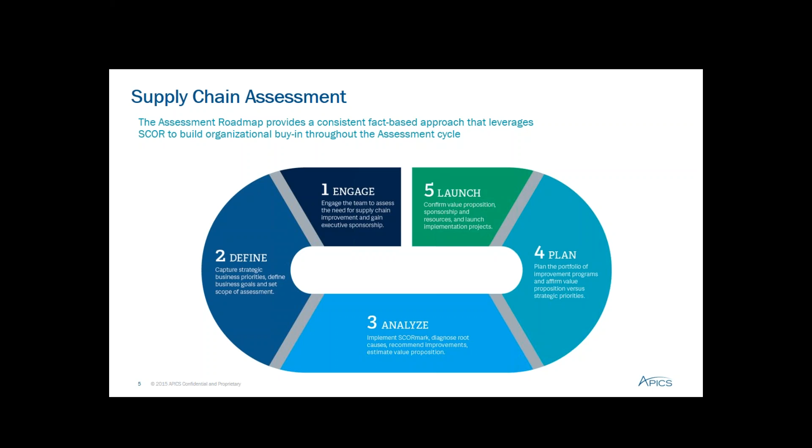The key we have learned is to think big, act small, and scale implementation fast. If you want more information on how APICS can work with your organization to improve your supply chains, please feel free to contact me. My contact details are included at the end of this presentation.

As I mentioned previously, benchmarks and best practices are critical to understanding the current state and performance gaps of the strategic supply chain. To share with you some exciting benchmarking research recently conducted in the chemical industry, I am excited to introduce John Brandt, CEO and founder of the MPI Group.

John has devoted more than 2 decades to studying leadership in effective, purpose-driven organizations. As an expert on how companies can adapt themselves to the realities of new markets, new corporate structures, and new customer expectations, Brandt is an accomplished management innovator and an internationally recognized expert in manufacturing and technology.

Before founding the MPI Group in 2003, John was publisher and editor-in-chief of Industry Week magazine, which garnered more than 70 editorial awards of excellence and doubled its revenue under his leadership.

Additionally, John serves as the president, publisher, and editor-director of the Chief Executive Group, publisher of Chief Executive, where his leadership transformed the magazine into one of the publishing's most surprising comebacks.

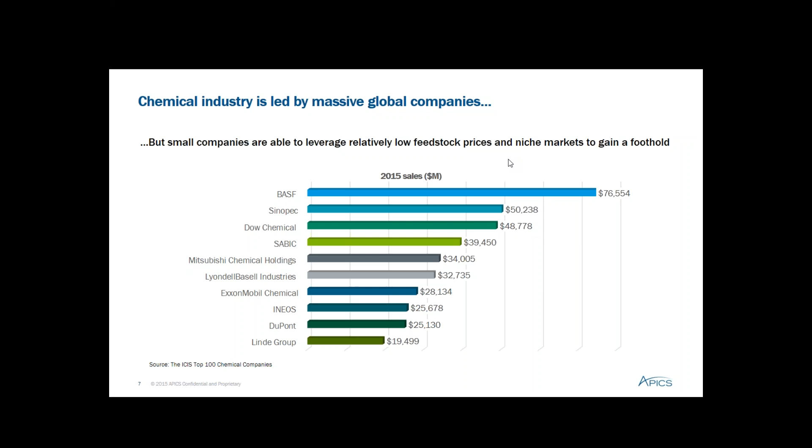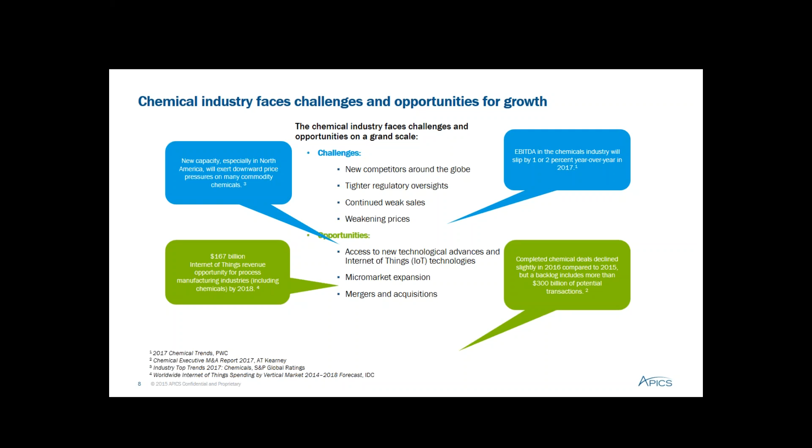On the other hand, there are enormous opportunities right now. There are technological advances, not just within the processes and machinery and new formulations, but also opportunities by using the Internet of Things, IoT technologies, to improve production. There's a lot of new markets for niche chemicals, a lot of micro markets emerging, and there are mergers and acquisitions. Just in the M&A space alone, last year completed deals were slightly down versus 2015, but there's a backlog of about $300 billion of potential transactions. And if you take a look at revenue opportunities related to the IoT—in terms of improving production, but also starting to figure out how to use IoT in products and delivery of products—there are estimates that there's $167 billion worth of opportunity there. So tons of challenges for this industry, but also tons of opportunities going forward.

What this means, though, is that when you've got opportunities and challenges like this, it's really important for executives to be strategic and to be looking forward, but it's even more important for those executives to make sure they've got people working operationally to figure out how to build a really solid operational foundation so we can grow, so we can take advantage of these opportunities, so we can meet these challenges. What we find is that companies doing great things are focusing on that foundation of operational excellence, making sure they've got the processes in place to be first to market with new products and innovations, to use new technologies including the IoT, and to meet customer demand for more customized, more niche products.

Something that's been a trend within the discrete manufacturing industries for years, rapid changeovers, is increasingly important in process industries, and especially in the chemical industry. And of course, when there's M&A opportunity and there's money out there, you're always wanting to look at improving your

book value so that you can maximize the opportunity for you to acquire or to be acquired. The first step in any operational improvement is to, whether you're working on your business, whether you're working on your golf game, whatever you're working on, the first step is to take a look at where are you right now and how do you rate versus everybody else.

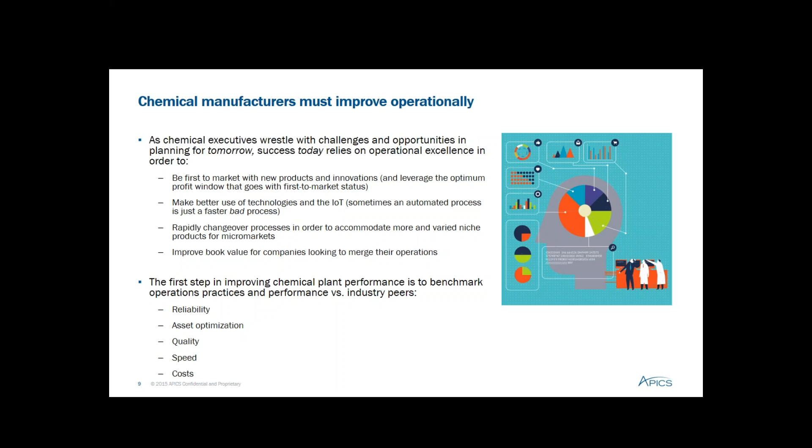So in looking at that, we look across the board when we're looking at manufacturers. We want to look at things like reliability, speed, costs, quality, and asset optimization. And that's what I want to start with here today, is talk a little bit about where people are at with those.

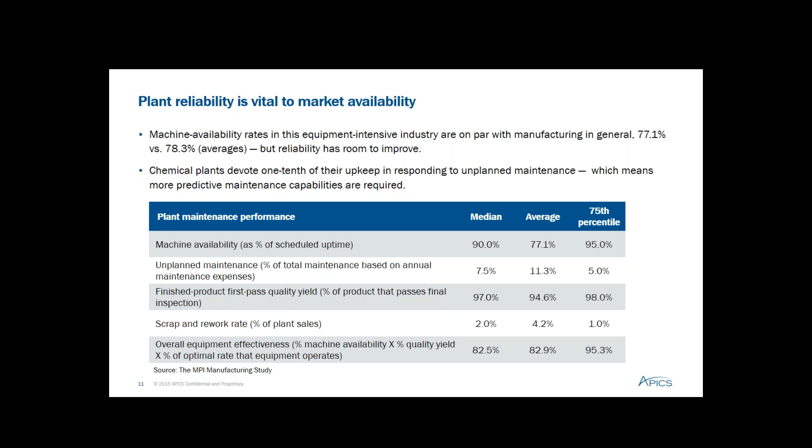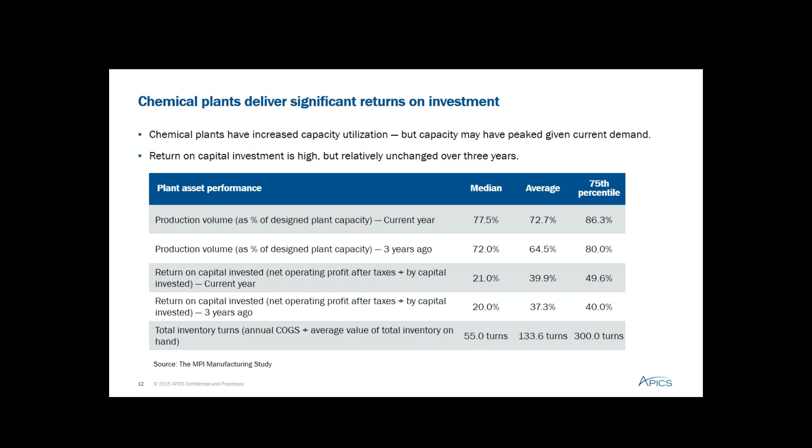We found, obviously, that if everybody in this industry knows, but research confirms, people in this industry are obviously focused very intently on their product and on operations quality, because quality is a key differentiator in any industry. It's especially important in the chemicals industry. It's even more important given increased regulatory scrutiny on this industry.

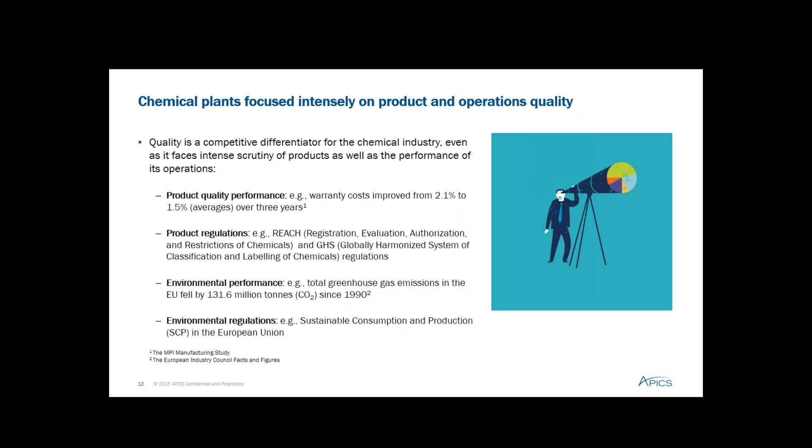environmental regulations, the industry has done some since 1990 in reducing greenhouse gas emissions. I know there's a lot of talk about potential regulatory reform in the United States. That may or may not occur. We're not seeing a lot of movement of legislation right now in the U.S. Congress. This is something that is clearly, whatever happens in the short term, in the long term, focus on quality, focus on some environmental and meeting regulatory requirements is going to be increasingly important in this industry.

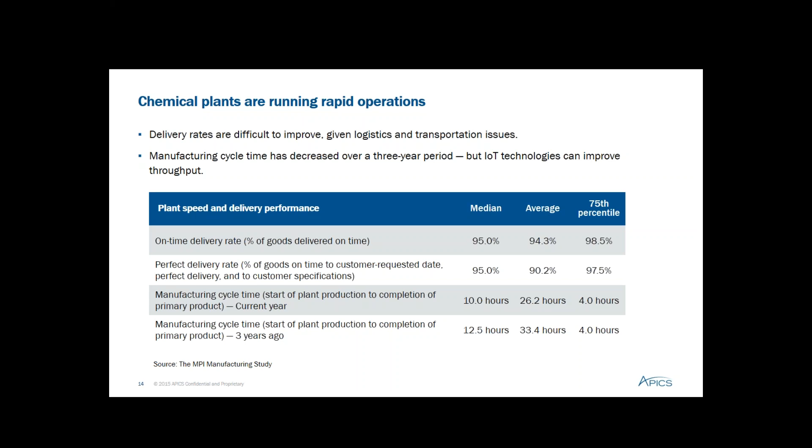I think there are some technologies out there that are going to improve production, improve speed here, and be able to improve quality for folks as well. And we'll talk about those in a little bit.

Again, this is an industry that has historically outperformed other manufacturing industries in terms of productivity. If you look at manufacturing in general, the average productivity, measured in sales per employee, is $256,000. In chemical, it's $374,000. These are typically large plants operating automated equipment at high volume. It's no surprise, and a majority of these plants were able to increase their productivity over the last year.

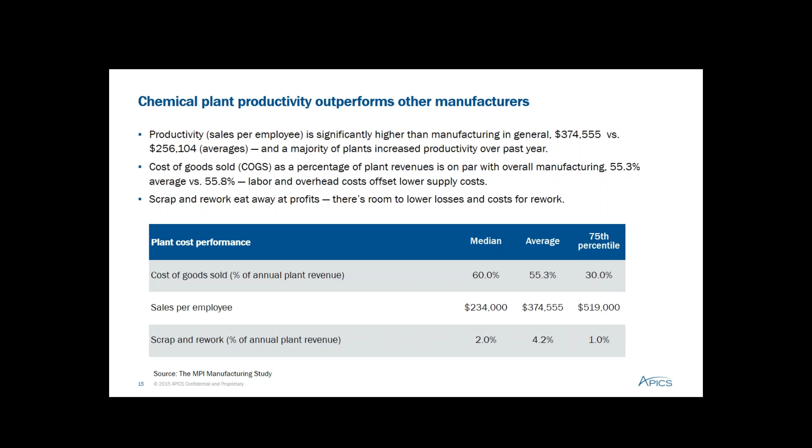Cost of goods sold is about the same as the rest of manufacturing. But again, I want to point out once more that scrap and rework as a percentage of annual plant revenue, that's a big percentage, 2% there. That is something that with improved processes, improved adoption of best practices, can be worked on and managed.

So let's talk then a little bit about best practices, a little bit about what people can do to work on some of these.

This is where I think there's a huge opportunity here, and I want to stress this, because we're going to go through a series of things that people can do, and stuff that you see in other manufacturing industries is typically just not done at the same rates or at the same level in the chemical industry. And what do I mean by that?

The problem comes in, as often happens, when you start looking down into specific practices. Typically the reason I like to look at this is that if you ask people whether they've adopted a specific improvement methodology or continuous improvement, a lot of people say yes, because they may have just tried it, somebody went to a seminar, somebody read a book, they tried it in one line or one aspect of the plant, etc. What we like to do is dig down a little bit more and ask about specific practices, because that typically gives you a better picture of how thorough, how deep, how long-term an implementation has been, and whether it's serious or not.

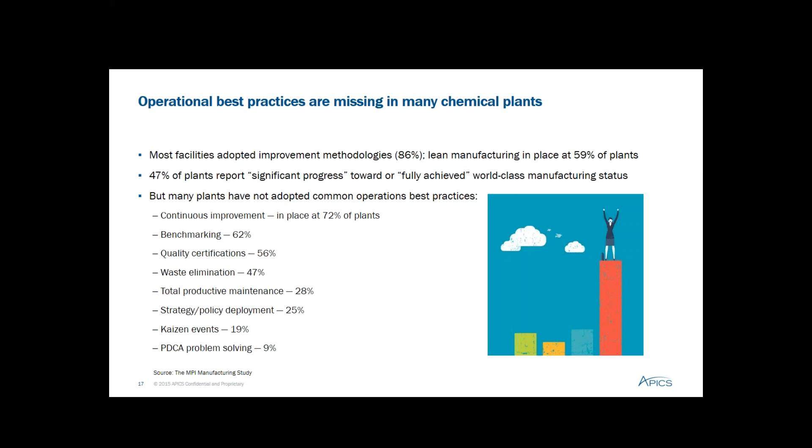It is clear that in this industry, a lot of the practices that you would think would be present at a plant that is really serious about an improvement methodology or continuous improvement just are not being adopted at the same rates. And that's a concern, and that may explain some of the other metrics we looked at earlier, the scrap and rework, the unplanned maintenance, why those numbers seem persistently high and oddly high compared to maybe some other industries.

There's a lot of reasons for this, but one of the reasons that can happen is that if you look overall at all of manufacturing right now, obviously improvement methodologies, there's a lot of them: theory of constraints, Six Sigma, lean, etc. When you look across most of manufacturing, you've got about 80% of manufacturers who have tried lean, obviously much lower in this industry.

The reason for that is that lean, especially early on, was often perceived by those in the chemicals industry, and really in any process industry, as being something only discrete manufacturers would do, because it was only related to one-piece flow processes, labor-intensive operations. You're working on this, and that's how you do it.

What we are finding more and more right now in process industries is that people are now saying, look, there's ways for us to adopt lean, there's ways for us to use lean in this. One example is Adam Russell of Eastman Chemical Company, who talks about the fact that you need to get away from just thinking about lean as something for discrete manufacturers, and take the principles of lean but remove them from that discrete context.

The way he suggests doing it, in an article in Chemical Processing called Go Lean, is to do what lean does: figure out what is your value, map your value creation process, and then figure out what are those measures that matter to your organization. Then when you're taking a look at that value stream, take a look at what are the things impeding that. What are the things, for example, causing unplanned maintenance? What are the root causes of that?

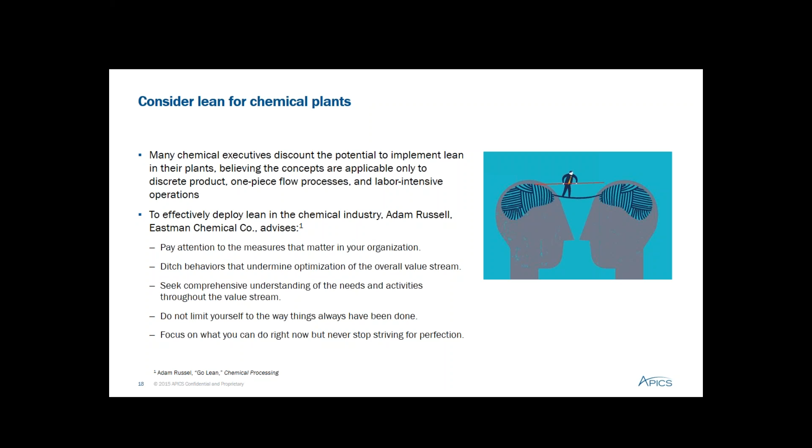The reality is, when somebody comes up with a great new idea in an industry, it is usually not the first time it was thought of on the planet. It was usually benchmarked from one industry and brought to another. So that's the way to take a look at it, and I would really encourage you to look at lean, but taking it out of that discrete context and putting it into a process context.

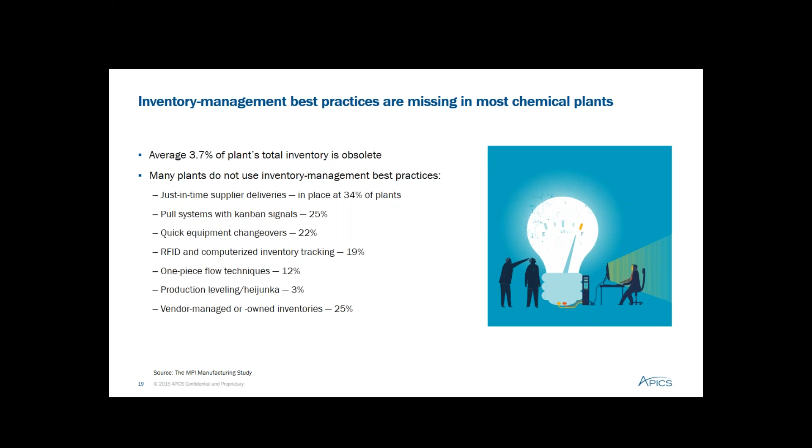So there are real opportunities to adopt not necessarily even leading-edge stuff, but things that other manufacturers and other industries have been doing for a number of years.

Here's an example, an anonymized case study. This was a global chemical company that provides water treatment solutions, and they were having a problem common in the chemical industry: they could not manage their inventory on hand. At one point, they saw a 20% increase in their inventory levels in less than 4 months.

Everybody on this phone understands what that does to your cash flow, what it does to your bottom line, what it does to carrying costs, and what it does to production processes when people start seeing inventory pile up.

So they decided on a two-part management solution. This is not rocket science, just blocking and tackling. They set up ordering and stocking policies, which unbelievably they didn't have before. Then they established processes to continuously monitor, control, and improve their inventories. You can set this up through your ERP system or however you want to do it.

What they were able to achieve in a very short period of time was to reduce their carrying costs of on-hand inventory by almost a third. They increased their inventory turns from 8 to 9.

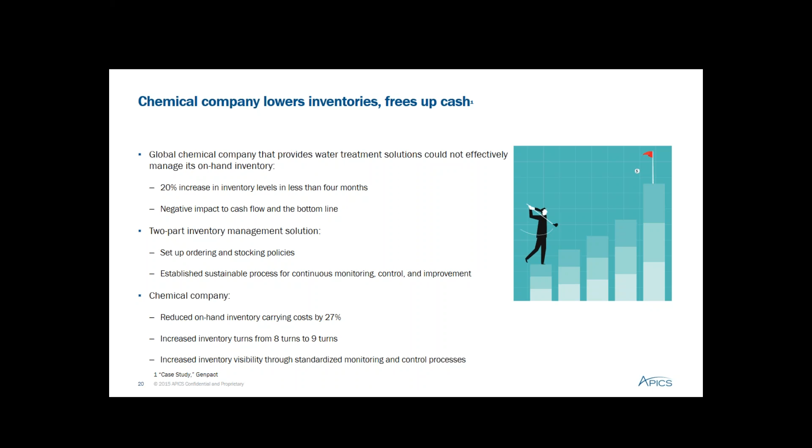Because they were monitoring it, all managers and executives had visibility into their inventory levels. The reality is, in management, this is just Peter Drucker 101: what gets measured gets managed, what gets managed gets better. So in some ways this is just as simple as awareness and putting a team on it to figure out how to manage inventory better.

We do find that most chemical plants are trying to pay attention to human resources and best practices. You've got a little under half who have empowered a majority of their production workforce, and that is something we see over and over again.

Plants that really perform well - the larger the percentage of workers who are empowered or in self-directed work teams managing the work themselves, the better the performance. About half of employees are fully engaged in their plant's improvement methodology, whichever one it is, whether it's Lean, Six Sigma, whatever.

We find over and over again, and we've been doing this study for 20 years at this point, that the more employees you have engaged in an improvement methodology, the better you do. The longer you've had the improvement methodology in place, the better you do.

We've got 41% of plants who say they train each employee more than 40 hours annually. That's actually pretty good for an industry average. 40 hours is what we've found over the last 20 years to be the world-class standard. If you want to be world-class, you're going to have to train at least 40 hours per employee per year.

If you look at really top-performing plants, they typically train even more - 60 hours, 80 hours. We've seen plants training as much as 300 hours per year in specific industries. I'm not saying you need to do that, but we do see that these plants that train more generally outperform.

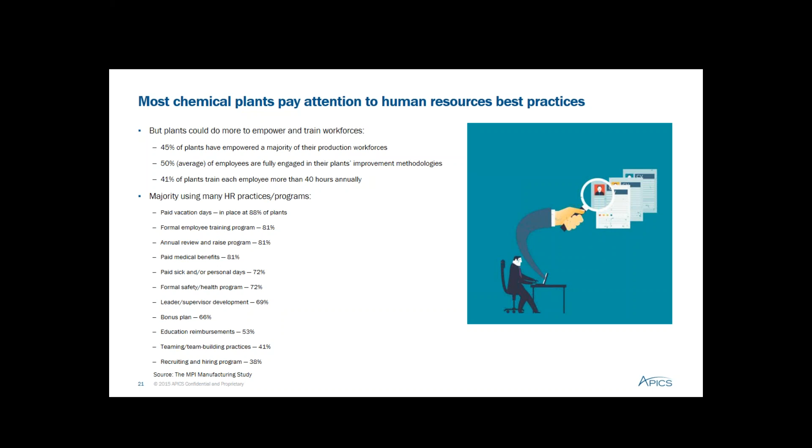A great example of a company that invests very heavily in HR in this industry is Dow Chemical. They've got 50,000 employees. If you're an experienced employee, your median pay is close to 100,000, and they put a lot of effort into developing a diverse workforce, having mentoring, cultural training, classroom training, and investing in flexible work options, et cetera.

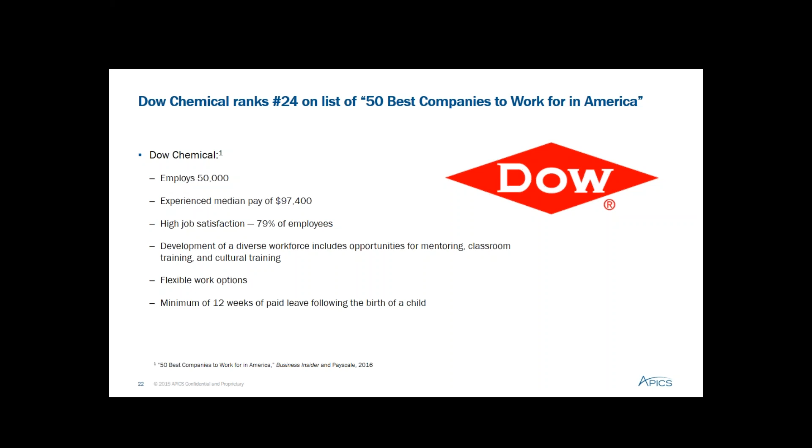This leads to incredibly high job satisfaction - close to 80% of employees report high job satisfaction. Investing in employees is something that always makes your results better in the long term. We've seen this over and over again: companies that train more, companies that empower more, companies that invest in their employees get that back in spades from their employees.

Continuing the list of things that chemical plants could probably do more of, supplier management best practices are just generally missing at a lot of places. When we asked, what's this plant's relationship with suppliers? Is it a partnership? You've got only about a quarter who report it being that way. Only 23% describe their relationship with their customers as a partnership.

When you look at specific supply chain management practices, things you'd want to see in a place managing their supply chain well and proactively, certification is the only one we see that's over half. Everything else is underneath 50%: supplier management, sharing forecasts, customer sat surveys, collaborative design with suppliers and customers, access to customer forecasts.

When you look at that, chemical plants are really most likely to just measure and document quality, reliability, and delivery to schedule of their own suppliers. When you look at other things, like are they documenting criteria and performance of their suppliers, hardly anybody's doing that. That's a problem given that traceability is becoming either a regulatory requirement in many industries and locations, or a de facto customer requirement—traceability of ingredients, traceability of components, labor practices, ethics of your suppliers. This is an industry right now that's not doing as much as many other industries.

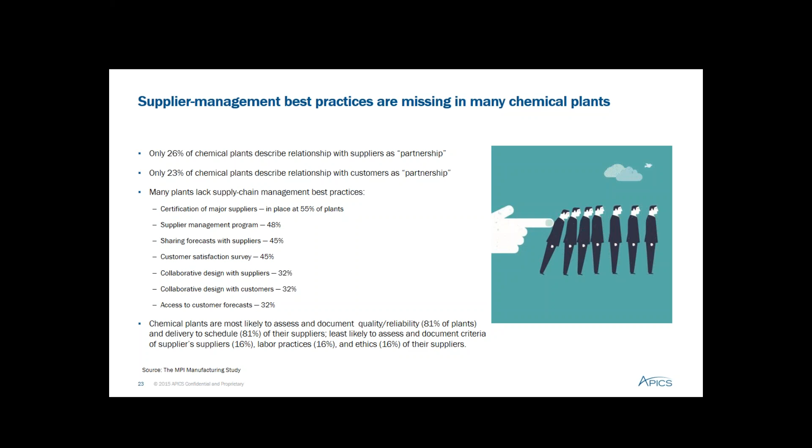So how do you get started? What should you do if you're trying to get started on this? You need to take a look—and I think Caroline mentioned it right at the start—you have to start with benchmarking. You have to figure out your process, your method, and figure out against an industry standard. The SCOR model is a good one, or some other model, to see how we're doing versus that.

Of course, the challenge then is figuring out getting that number. You don't want to just get a number so you can feel good or bad about yourself, like, oh, we're really good on that, or oh, we're really terrible on that. You want to figure out how do we take that and leverage it for improvement. There are lots of ways—I kind of like what AMR put in on how to benchmark your supply chain.

When you're taking a look at your supply chain, you want to figure out not just this specific product, not just this one thing. You want to look at your entire supply chain—tier 1, tier 2, tier 3 suppliers—rather than one particular aspect. You want to figure out, why are we doing this? If we're benchmarking this, does it give us any useful information? How is this going to change behavior?

That is the useful thing. If we were to find something about this, how would it change behavior, contracts, relationships? If it won't change any of those things, then you shouldn't bother tracking it. We also see that where people go wrong in starting an initiative like this is when they decide they're going to boil the ocean—they're going to try to do everything at once. You want to take a couple of things, start with that, and then expand.

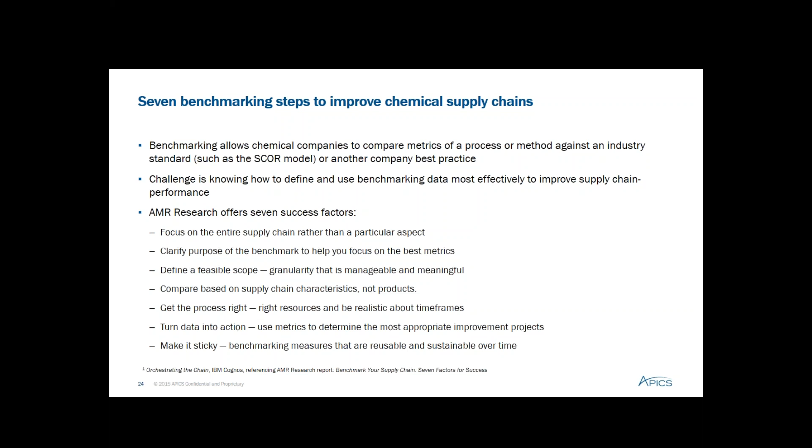That's supply chain. If we look at sustainability, we find now that it is not a major focus at most chemical plants. We've got under a third who report that green and sustainability is highly important or important, and a full third that say it's either only of minor importance or we don't care about it at all. You do see some green sustainability practices at some plants. They tend to be related to things where it directly translates to the bottom line: energy management, recycling and reuse. When you look at stuff like renewable energies, carbon footprinting, et cetera, much, much lower.

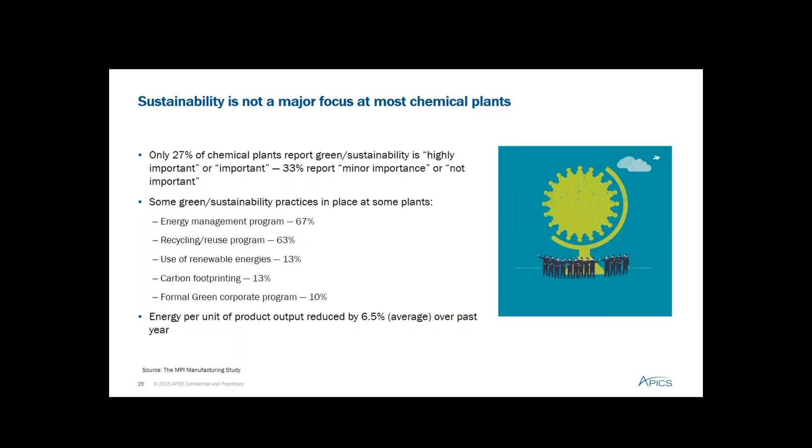Some of those programs do have an effect on the bottom line. Energy per unit of production was reduced by 6% over the last year, as the average. But this is an area where chemical plants aren't doing a lot now. They either by customers or by regulatory fiat are likely to have to do more going forward.

So what do you do? How do you change? You want to start with benchmarking. You want to take a look at that for a number of these different areas. But what we see that really changes, and I've alluded to this before in this presentation, is how do you change the culture? And this is another anonymized case study here. You've got a specialty chemical plant, had close to 300 employees, and basically employees didn't like working there.

You had more than 60% of the workforce were detached or disengaged, and that leads to a lot of things. It doesn't just lead to poor quality performance, which of course leads to poor financials. It also leads to people not caring about a safety program, which means your safety program is off. And safety is an incredibly important measure of employee engagement, and is also incredibly important just for the human cost, obviously. You don't want people to get hurt, you don't want people to get killed. But beyond that, a company's focus on safety, and sometimes using safety as a focus of improvement, shows employees that there's an investment, that you care, and it also makes people think differently about processes and about how to do things.

So leadership put a large investment in trying to change the culture by focusing on safety, by focusing on working with employees, sharing goals, et cetera, building a more collaborative work organization, sharing the goals, roles, communicating, figuring out, doing this. And by investing in culture, by the time they were done with this, they found the disengagement of the workforce had gone from 60% down to 5%.

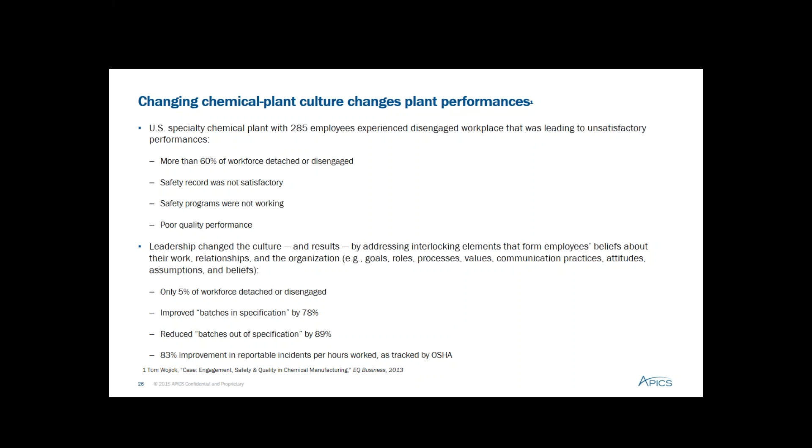This is really important. If I was running a chemical plant and I was looking at these numbers and some of these examples, I know that continuous improvement is important at any manufacturer. It's really important in this industry, in part because of the increased scrutiny from regulators and from customers right now, in part because customers want new products, micro-market products, but also because this is an industry where if you've got people not doing the basic blocking and tackling in terms of improvement methodologies or continuous improvement, there's no quicker way to improve your bottom line and your competitive position than to improve your operations by just adopting some of these things we all know work. And if anybody's interested, I can prove to you six ways from Sunday that it works.

So I would encourage everybody on this call to take a look at some of the benchmark data that I presented. There's more available—benchmarks from us, from APICS, from other sources. Take a look at that and figure out how we're going to improve our operations so we're running as smoothly as we can right now, and ready for the challenges, but also the huge opportunities going forward.

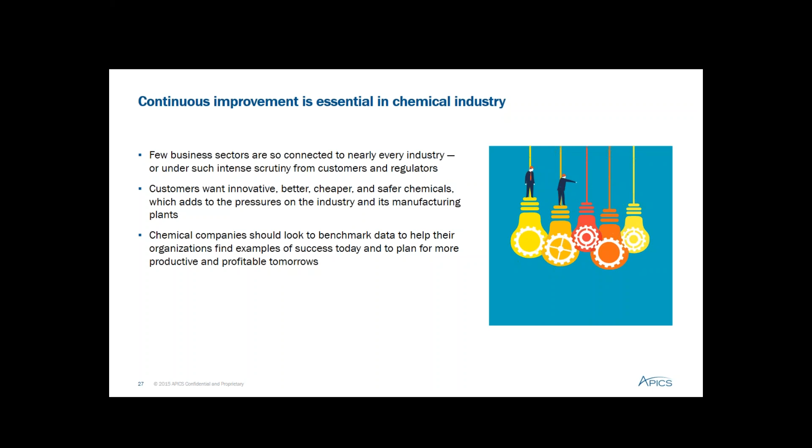I think we've got time for questions, but I'm going to turn it back over to Carolyn. John, thank you so much for that informative and exciting presentation. I really learned a lot, and I hope everyone on the call shares in that. We have a lot to learn and a lot to gain from looking at how we're performing today.

We do have a couple of questions that have come in. The first one, John, is on S&OP: how is S&OP being implemented in chemical industries to manage the balance of the supply chain triangle, i.e. stocks, costs, and service level? Are we doing anything in an S&OP environment differently in the chemical industry that either helps or hinders our ability to balance the costs around stocks and service levels?

I think we're seeing some interesting stuff here. One of the issues you see in this industry with S&OP is that the linkages between customers and suppliers in terms of forecasts, etc., are only as good as the data that goes in. Given the fact that we've got fairly poor linkages—customers and suppliers generally don't have much of a relationship, it's more transactional—forecasts aren't being made available throughout the value stream, so it's really hard to run S&OP, whether it's an annual operations plan or whatever, if you're just guessing at the numbers. So we see some interesting stuff going on here right now. I think the concern is that with the level of sharing of information among suppliers and customers, it's difficult to do.